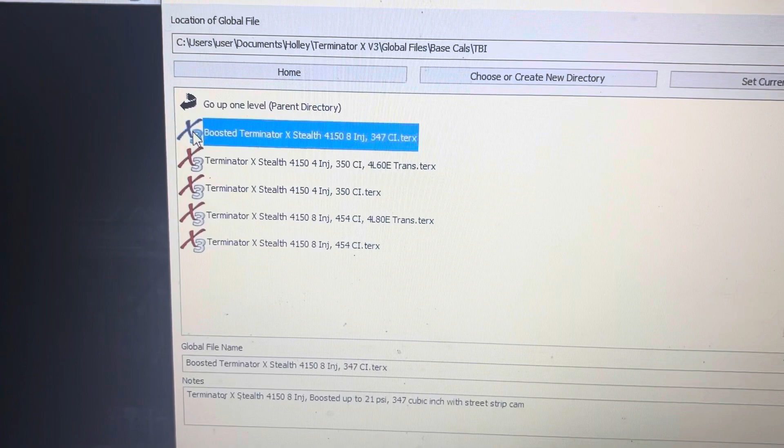You can go into the software and switch all the parameters to your exact setup. I started off from scratch, but this is just a cool little thing they did to get us started, fellas. You've got Hilborn, a small block Ford and a big block Chevy on there. As you can see, it can run just about any engine with some software changes and a harness swap. So it's pretty modular and upgradable. Some Hemi base cals.

And you know, it's really aimed at the GM, the LS. So let's go and click LS. Yeah, you see all the base cals it's got. Some naturally aspirated, I'm pretty sure, turbo, supercharged. This system is pretty badass, fellas.

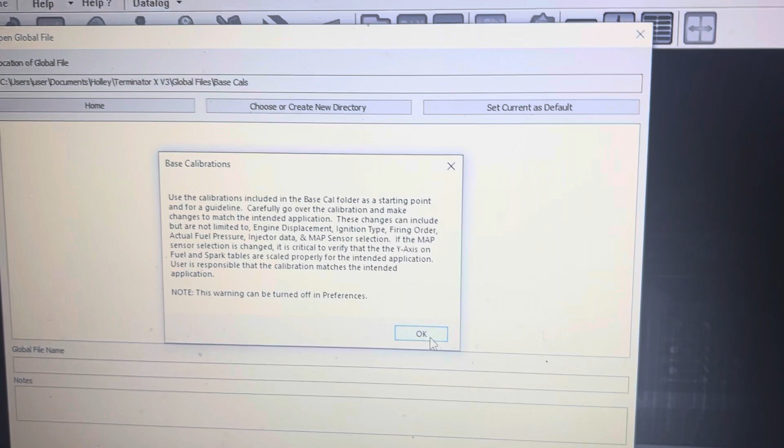How I'm using it is pretty basic with the TBI. Most guys will say if you're going to do it, you might as well go multi-port, and they are correct. But this is a pretty awesome system, the TBI too. You've got some LT base cals.

I think you'll also need another module if you're going to do the LT stuff, the Hemi, or the Fords. I think you probably have to buy an extra module. But you can run the Godzilla, the Coyote, big block mod motor, and the small block Ford. It's pretty badass, fellas.

I'm going to go into my file. What you see right there, LucilleVE, that's what I named it. You can go right in and go to open. When you open it, this is what you'll get. Across the top right there, those are ICFs, which stands for individual config files.

You've got your fuel, sensors, your system ICF, your idle, your spark, your inputs and outputs. You've got advanced, comparison, and an IO pin map. They constantly come out with new updates, and the last update added the ability to test outputs and traction control. You've got data logging and a few other ones.

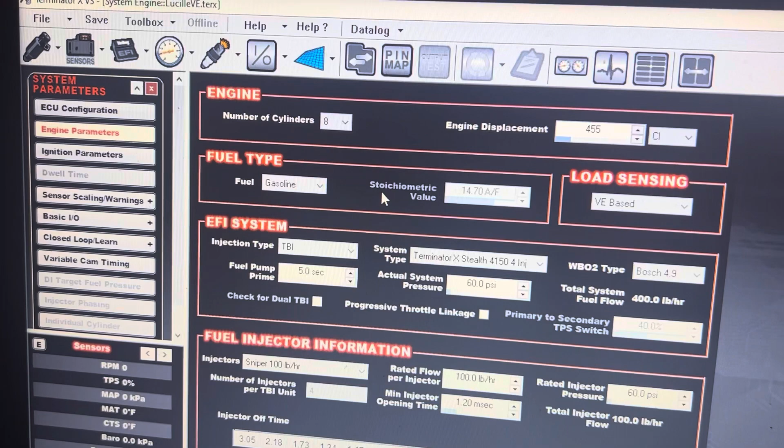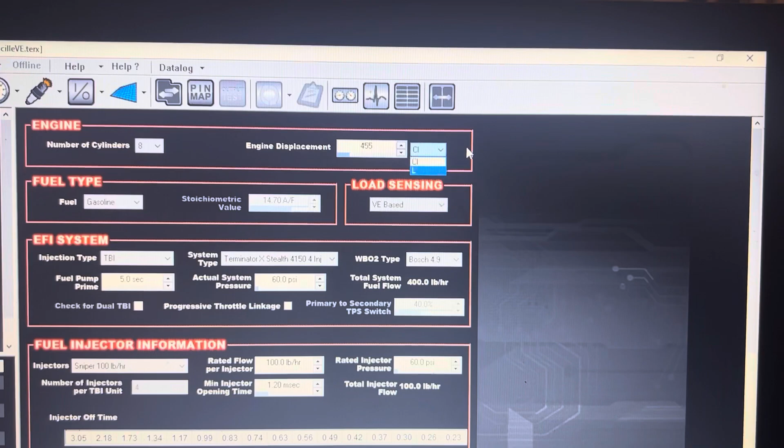The first thing you should do when you first get in here is go to the system ICF and set it up. I'll show you how that looks. You've got your number of cylinders, engine displacement. I've got a 455, and you can change it from cubic inches to liters, because a lot of guys run LSs, which are basically in liters, like 5.3 liters, 6.2. So I can change it to liters if I wanted to, and it'll be 7.5 liters for the Olds 455. The fuel type, you've got gasoline, E85 and advanced.

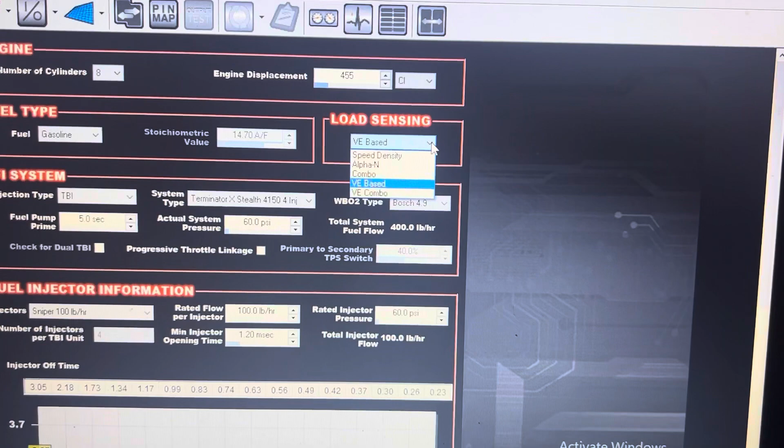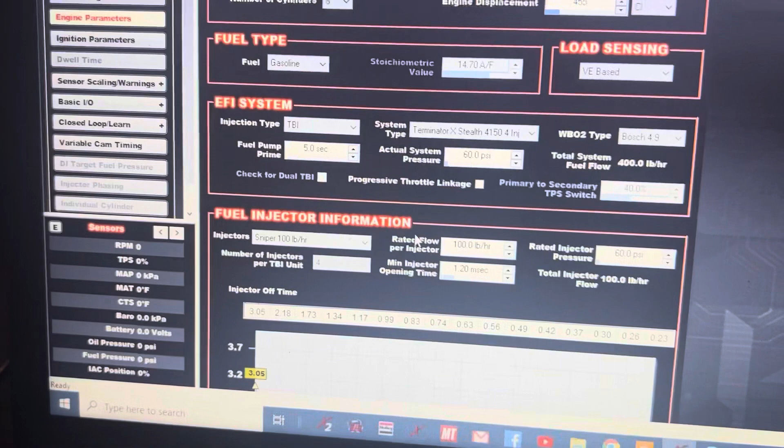You see the stoichiometric value right there. Load sensing, I've got mine on VE based. I found that's the easiest one. Some guys might run speed density, and there are a few other options for racing or stuff like that. You've got your injection type. You've got multi-port, direct injection. I've got a TBI, which is a throttle body unit, so that's why I've got that.

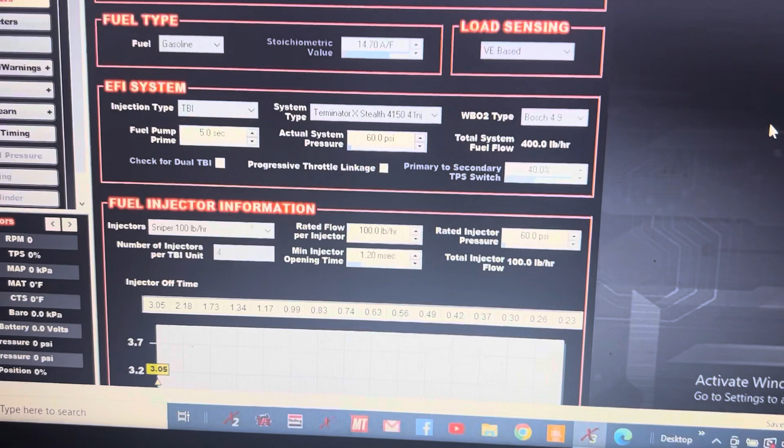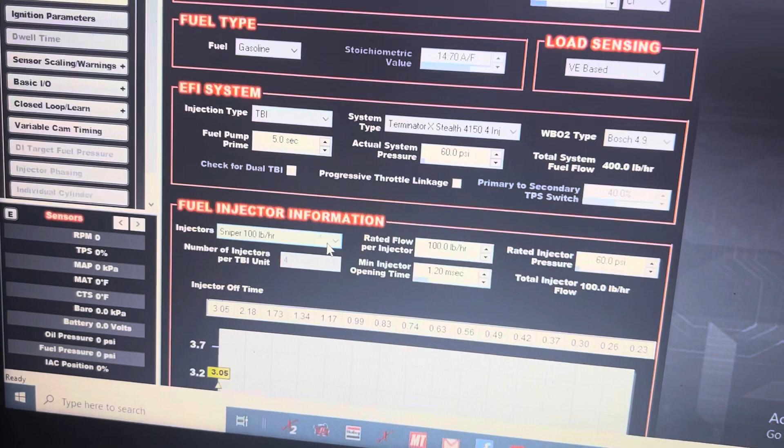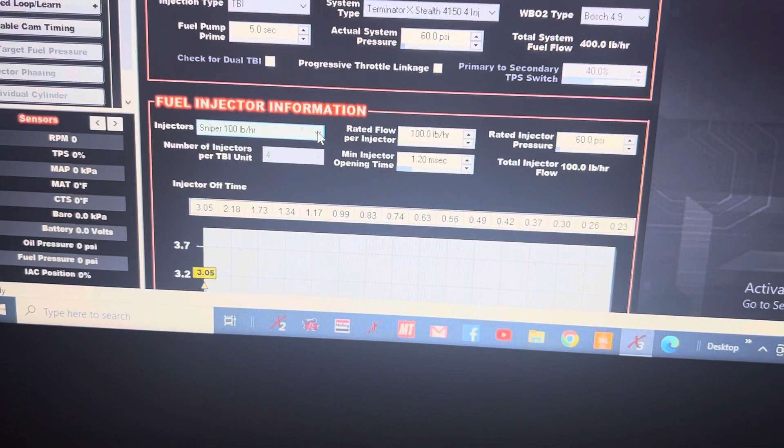But if you choose multi-port, it'll give you a ton of injectors to choose from down there. I've got mine set on TBI, so I only get options for the TBI injectors, which only gives me a few options. I can do custom. Most of the time when you buy injectors, they come with the data, so you can plug that in down at the bottom.

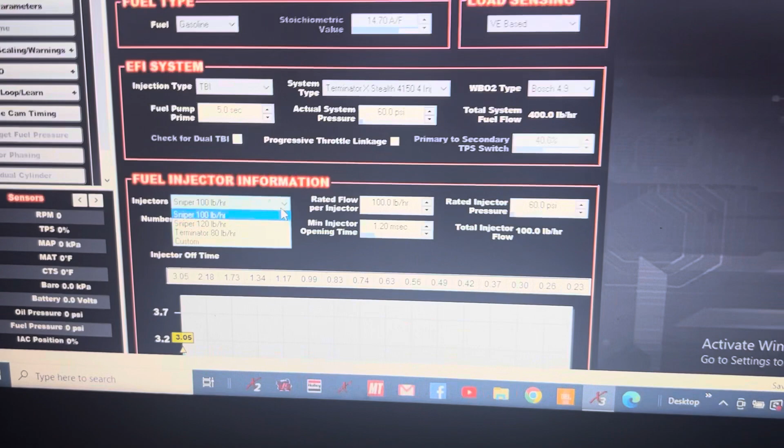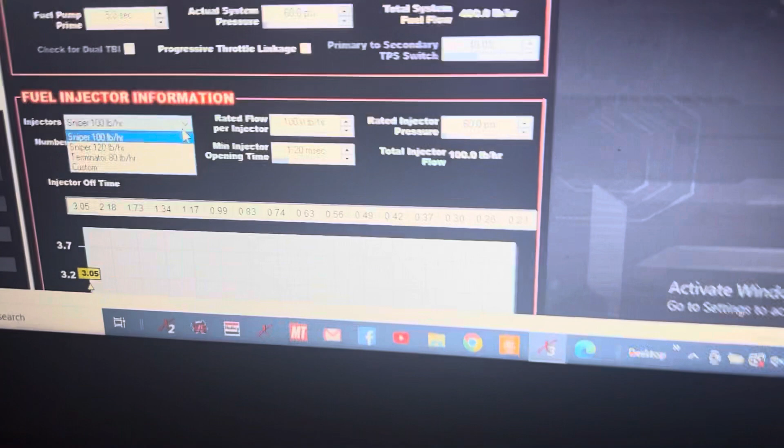With the VE based setting, all these need to be correct for it to do the math and come up with the correct fueling for you. So you want to make sure all that information is correct, as far as your actual fuel pressure and what your injectors are rated at. You want to make sure all that information is correct. Once you get all that set up, you can go over here to ECU configuration.

So I got the Terminator X, but it does give you the option to choose the X Max. And I think this ECU is really aimed towards just the daily driver LS swap, and the guys that are doing basic racing. If you're doing major racing and stuff like that, the Dominator and the HP would be good for you, because they can do dual oxygen sensors and an NTK sensor. And this one only will do a Bosch 4.9.

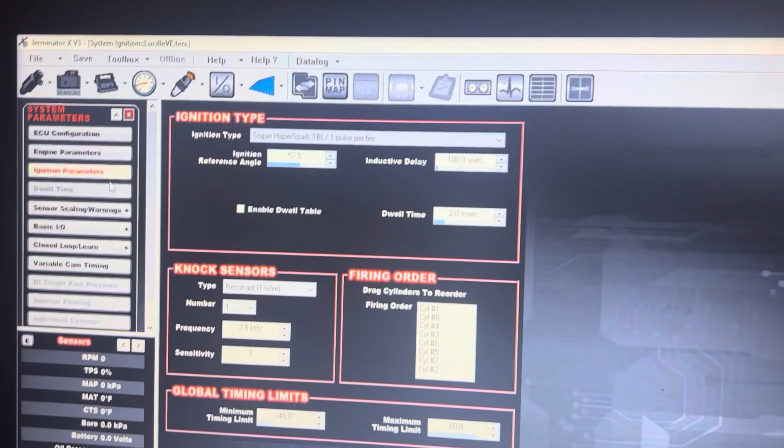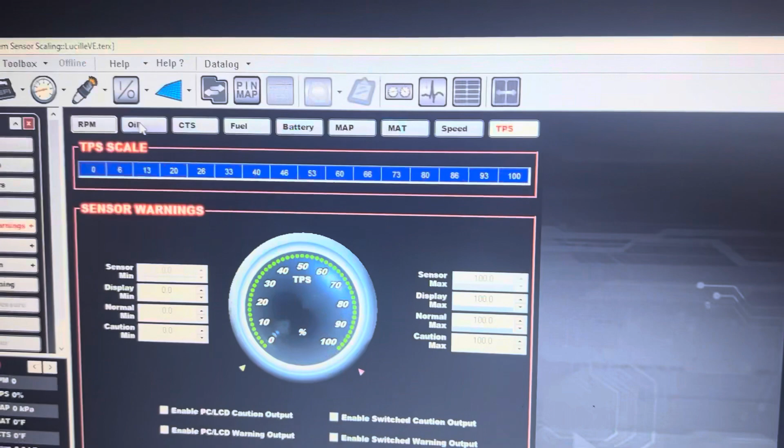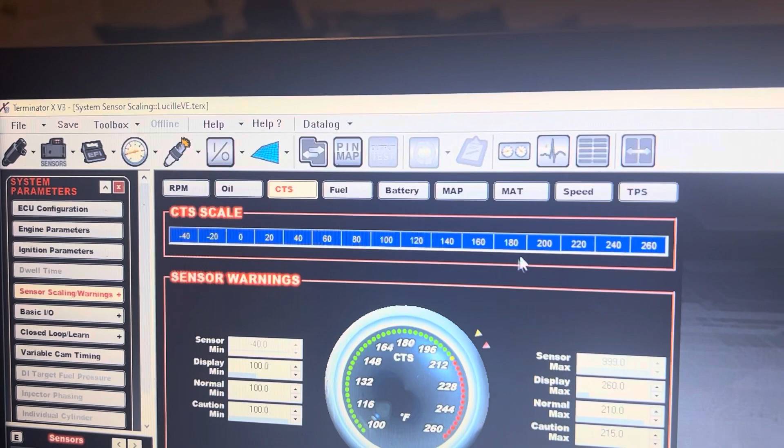And then your ignition parameters, whatever you got. I got the Sniper HyperSpark ignition system. And I just put all that information in, my firing order and stuff. And you got sensor scaling. You can just go through and set all your warnings for all your sensors. So if your coolant temperature gets too hot or something, it'll go off. And you got all that information right there. You can set that up.

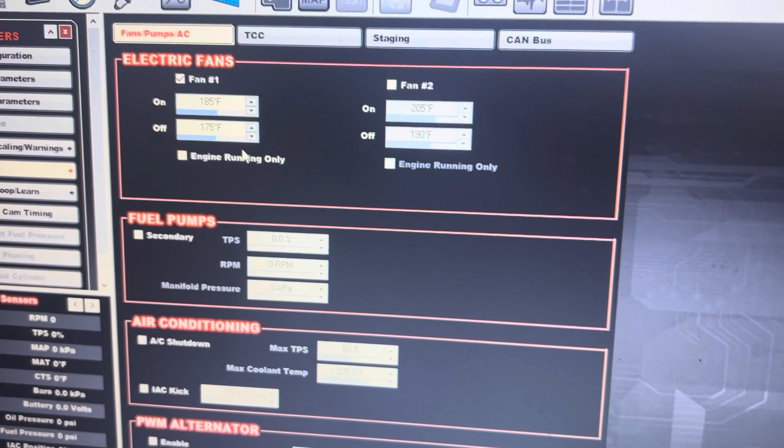Basic I/O. I/O is inputs and outputs, fellas. Input is something that the ECU sees. It's like the coolant temp sensor, the fuel pressure sensor, oil pressure. Anything that's information that it sees and relays on your display, that's an input. An output is something that the ECU is turning on, like fans, an AC compressor, fuel pump. That's an output. And those are just the basic ones you'll set up.

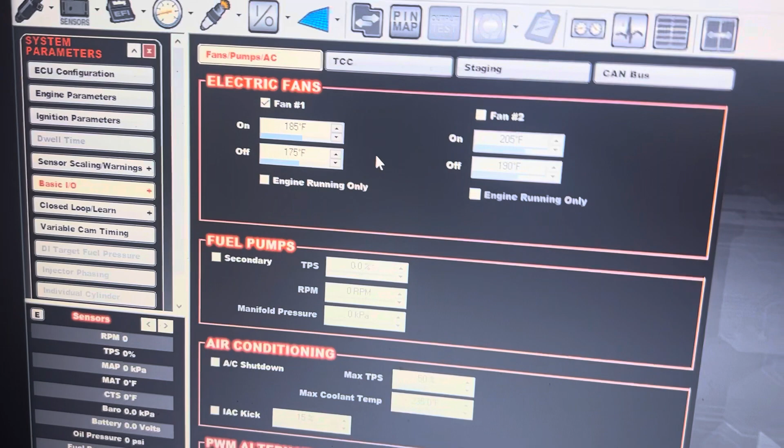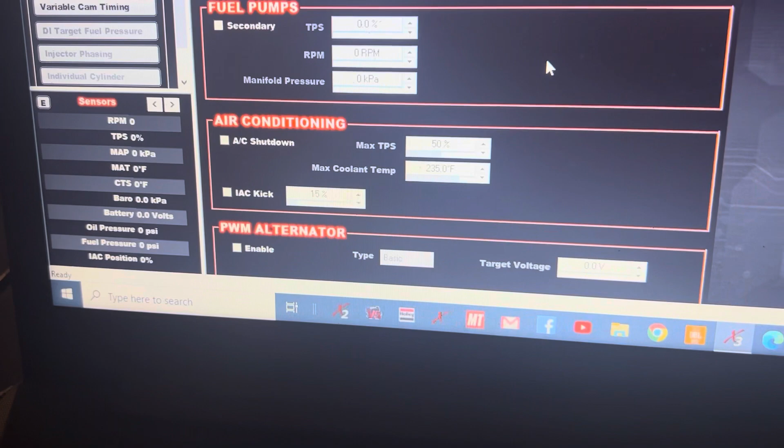It's got the ability to do dual fans, but I got both of my fans wired together. I got mine set at when the thermostat opens at 185, and they cut off when it falls below 175. And then you got the ability to do dual fuel pumps. And on the air conditioning, the AC shutdown, that is like when you go full throttle, you don't want the AC compressor on, so you can set it to whatever throttle position you want. I already got it wired, but when I charge my AC, that's when I'll enable it. And I'll probably set mine to like 80.

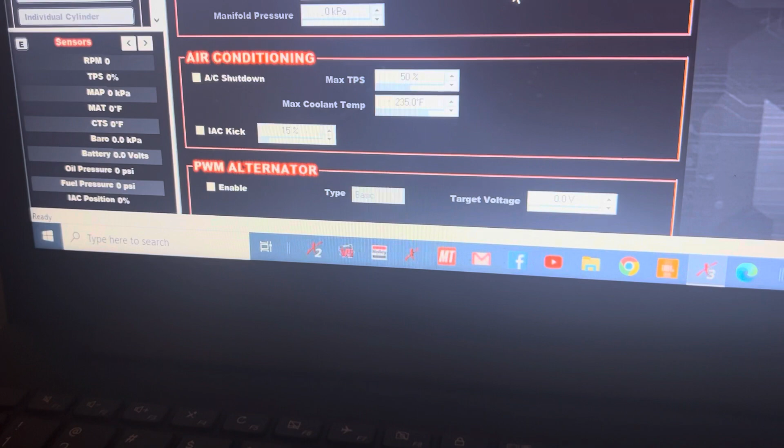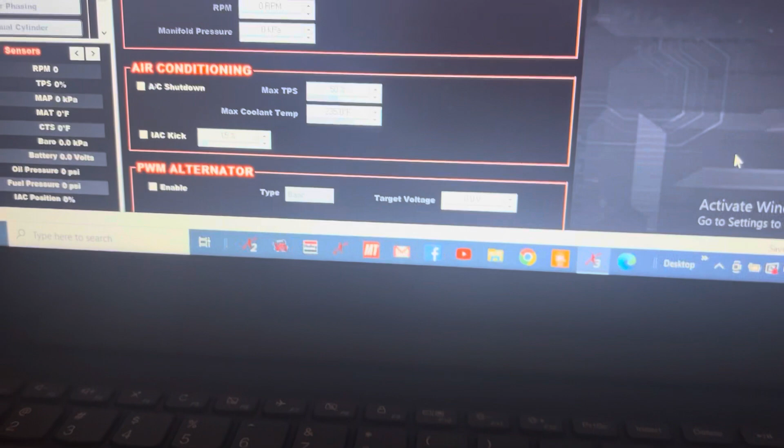And the IAC kick is basically once you turn the AC on, the compressor can drag it down, and you don't want it to drag it down and kill the motor. So you can set that to where it can kick up the idle a little bit if you need it. And then, I don't think this was on there when I first got it, they probably added it in the last update, the PWM alternator, which is pulse width modulation.

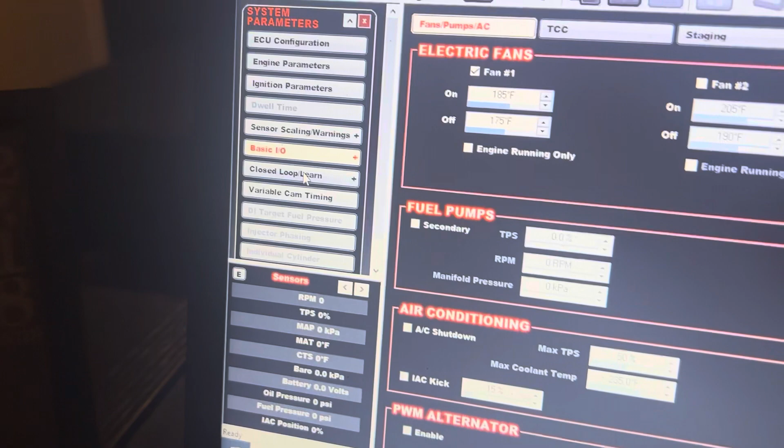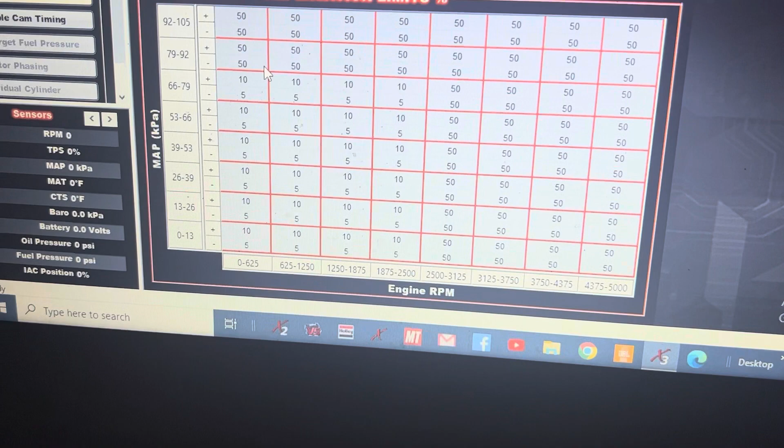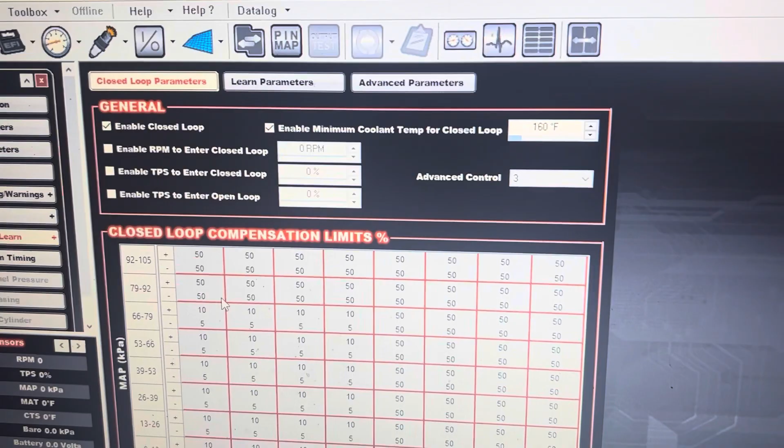Closed loop learn. That's basically how much fuel is taken out and added to achieve your target AFR. Once you get it dialed in, you want to dial these numbers back. I got my tune at the low end fairly dialed in, so I set those numbers back, but everything else I left because I still got to tune it at the top end. But you can go in and set it however you like. The closed loop starts learning and adjusting when it reaches 160, that's when it'll start adjusting the fuel.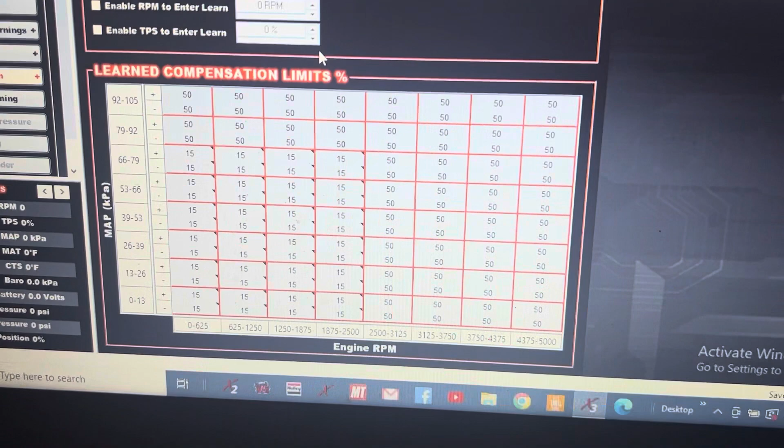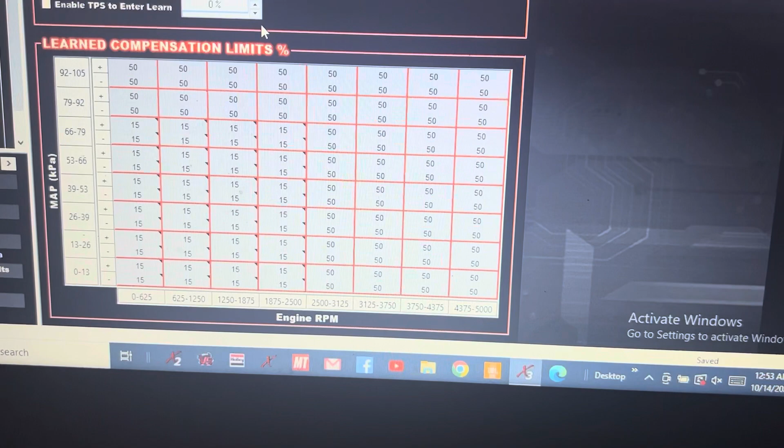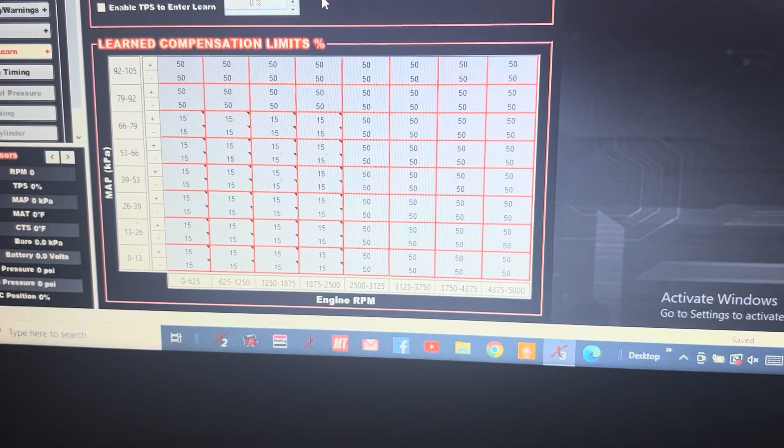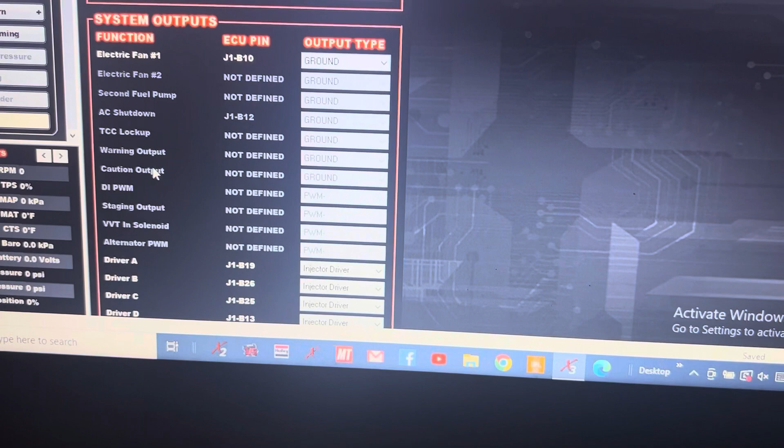Then you got your learn parameters. And that's basically the same thing as the closed loop learn, as far as how much it learns and takes away on the learn table. Most guys that are professionals don't even use the learn parameters. And once you get it dialed in, you can dial those numbers back. You got inputs and outputs. That'll basically just show you all the inputs that you're using and not using.

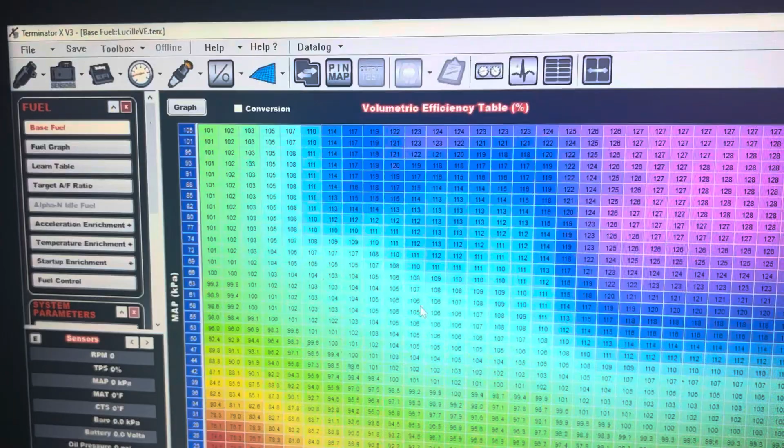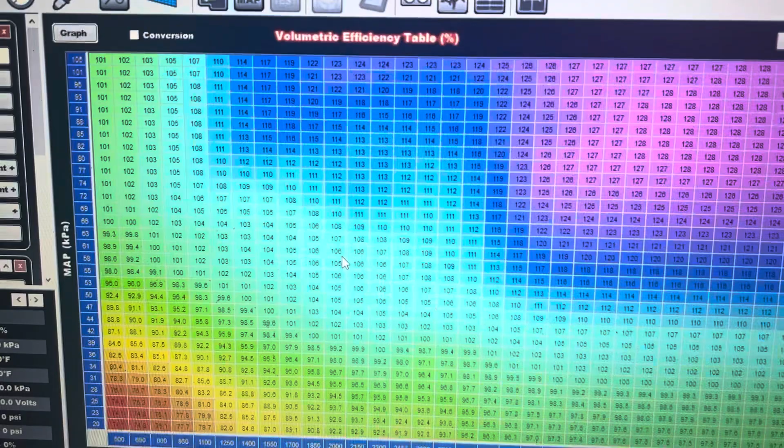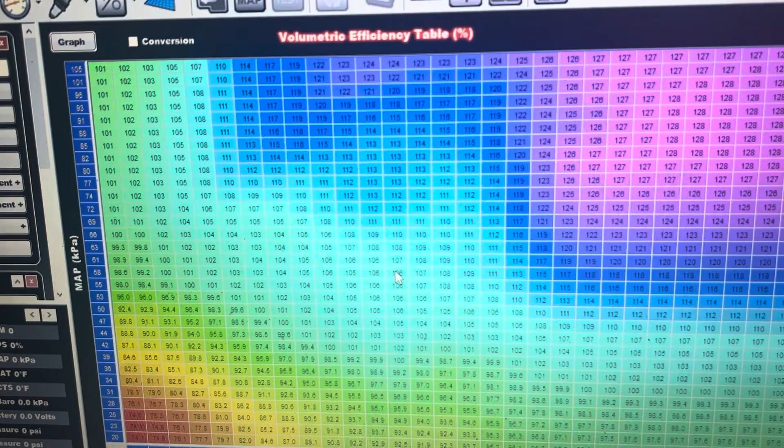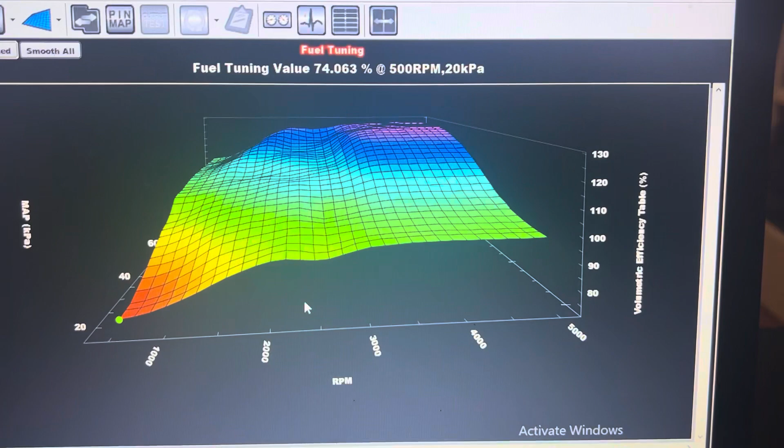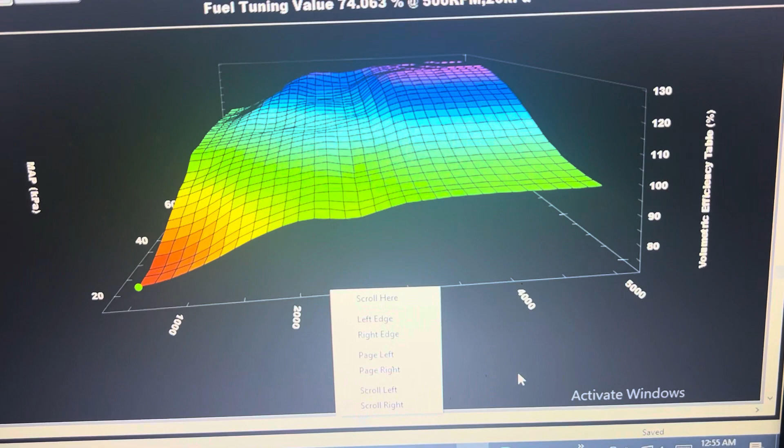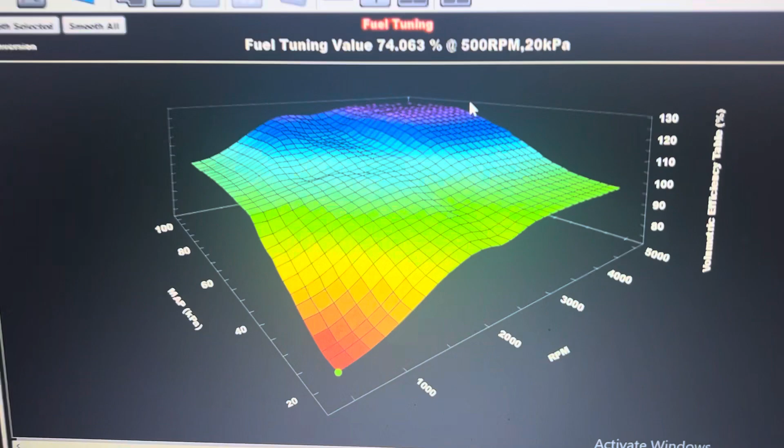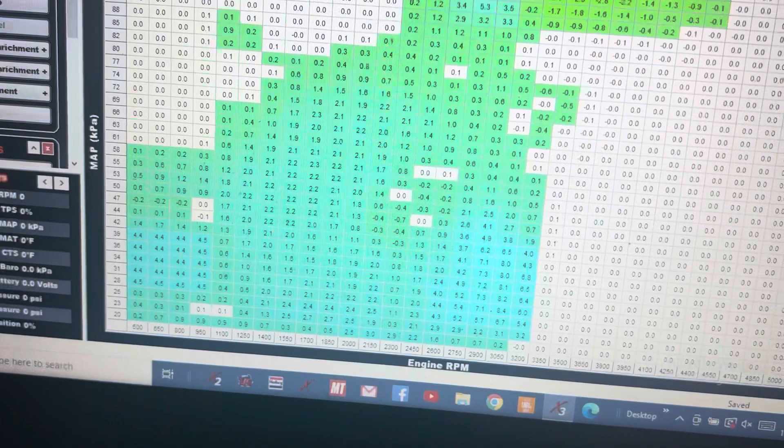You can go to the fuel graph, and it'll show you your fuel graph, so you'll know what areas need to be smoothed out, because you don't want any dips, valleys, or spikes. So you see I still got a little tuning to go on this one, just to get it dialed in. Y'all saw in my previous drives it ran good, but I still need to do some tuning. You go to my learn table, and that's basically when I drive, what is taken out or added to achieve my target AFR from my base fuel table, fellas.

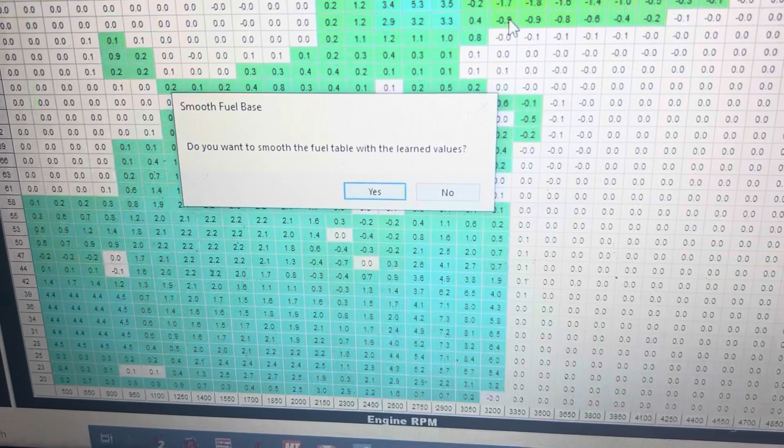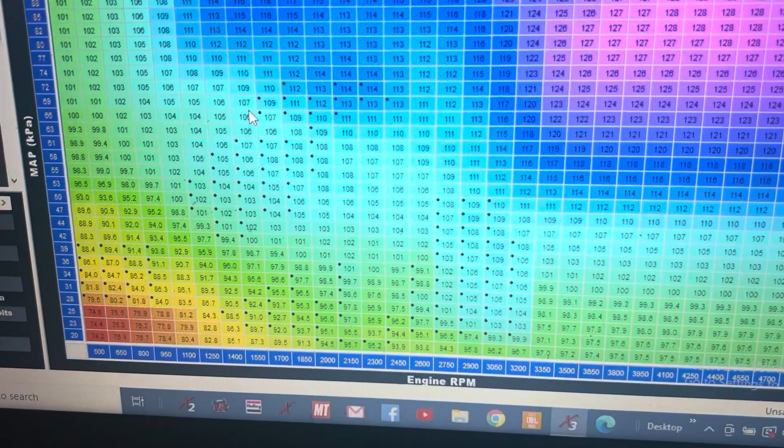So you can transfer this, as you see it right there, transfer learn to base, and it'll copy it to your base fuel table. You can go in and it'll ask you, do you want to smooth the table? And I always hit no, and I just manually do it. And if you go back to your fuel, I ain't gonna save this, but you'll see all the ones with the asterisk, that's what it's changed. And you go to the fuel graph, now you see my fuel table is changed.

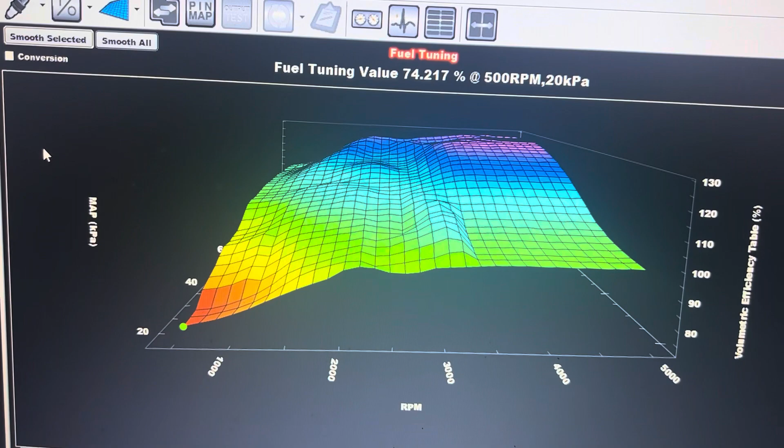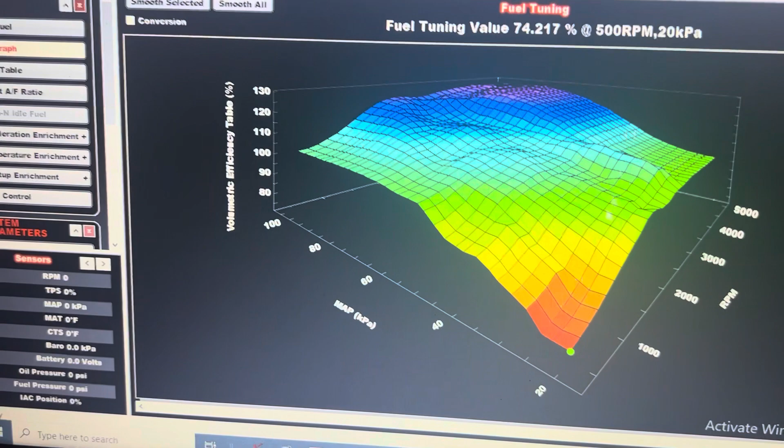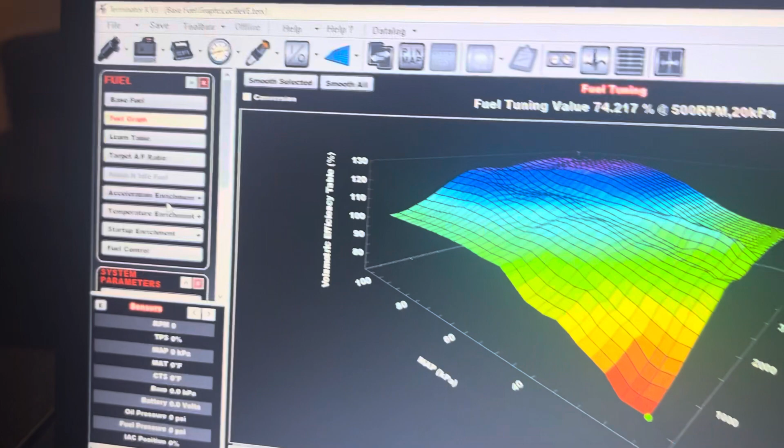Now I have to go in and just move it out so it'll run good. You want it to be as close to zero as possible on the closed loop comp. But it's something to play with, fellas. And you can always go up here to help and go to contents, and it'll bring up a whole help menu. You can just read that, fellas, and it'll go through all these details and stuff. I'm just gonna give you a walkthrough.

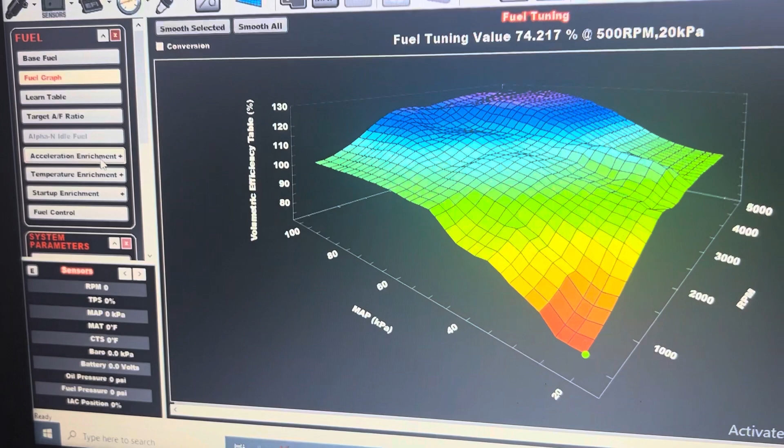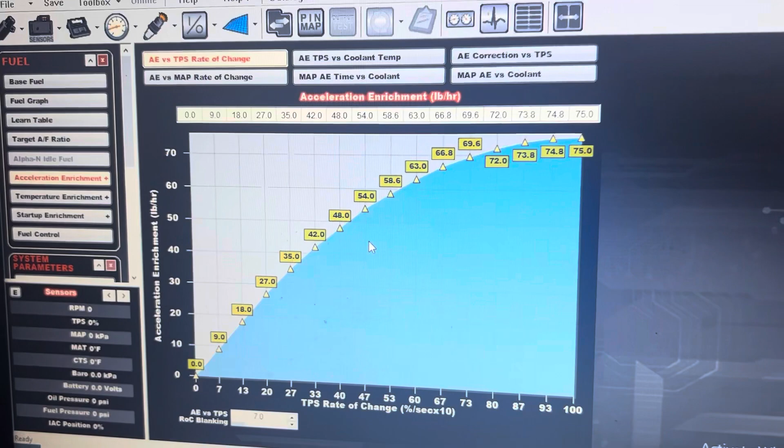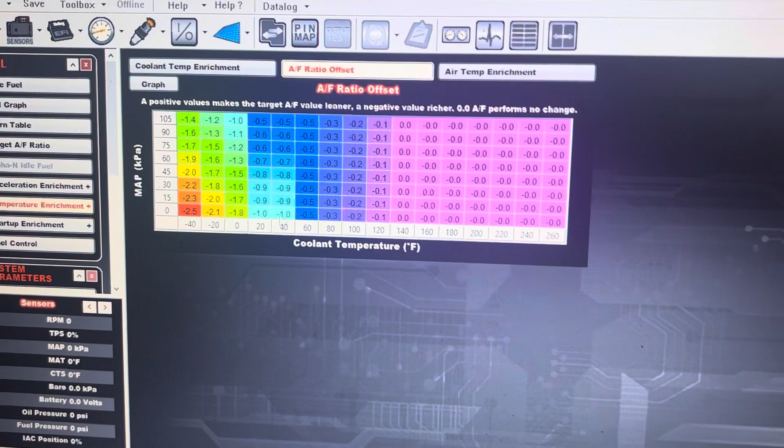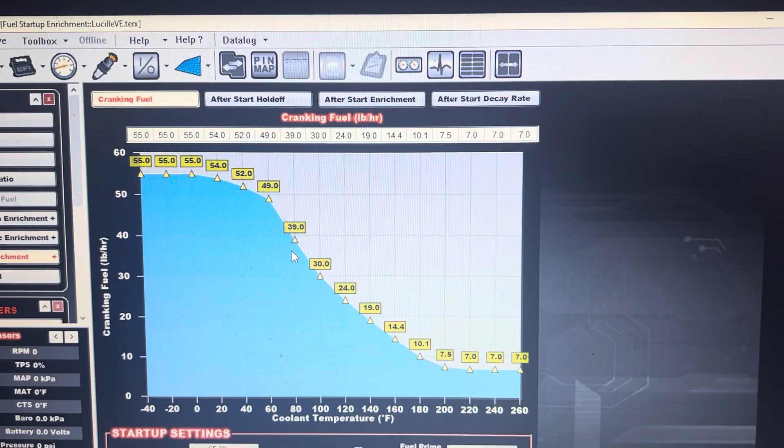Acceleration enrichment, I kind of look at that like the accelerator pump on a carburetor. And you can go through the contents and read what all these are. Then you got temperature enrichment. That's basically when the engine is cold, it'll richen it up so it'll warm the engine up. When it's cold, you need more fuel to run. Startup enrichment, I think that's pretty much self-explanatory. How much fuel it's adding to start the car.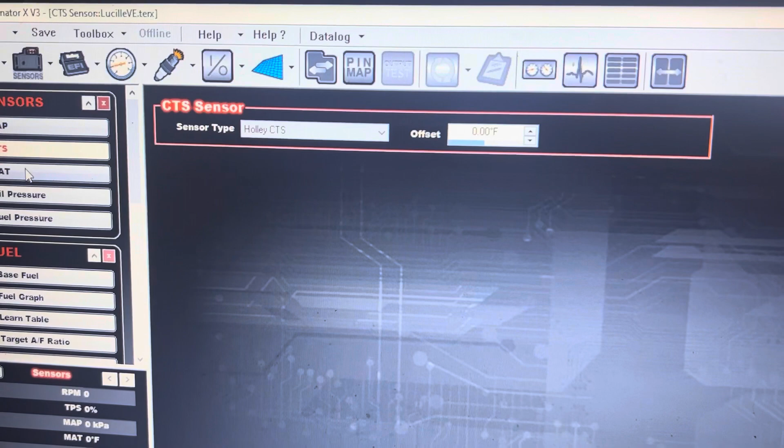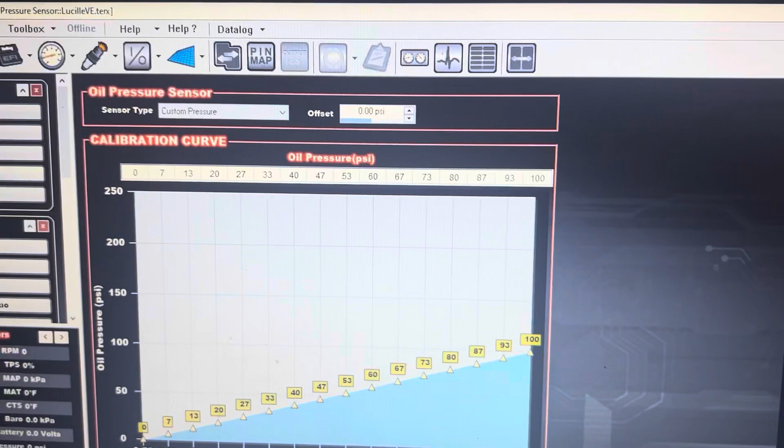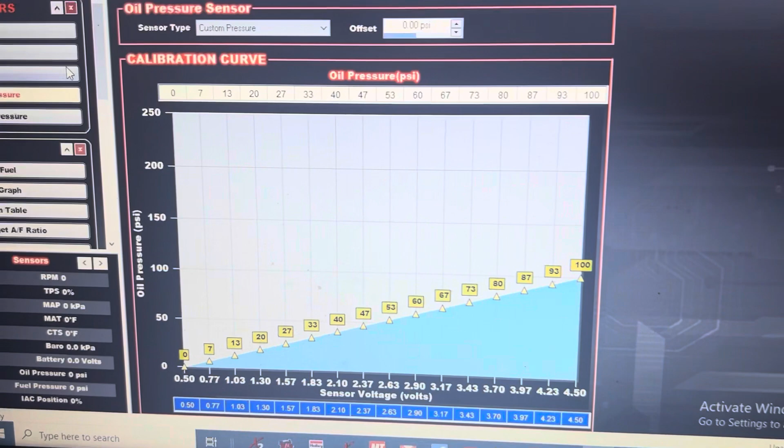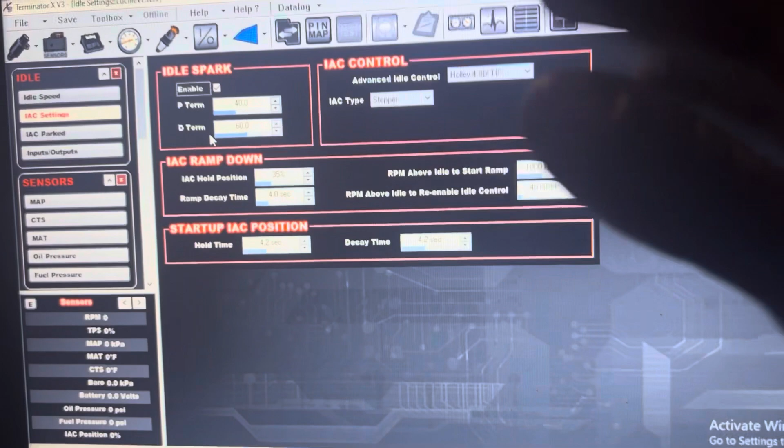Fuel control, haven't dived into that. Sensors, you just go through and pick exactly which sensor you're using. Holley, GM, Ford, whichever one. And you do have the ability to do custom ones, like my oil pressure is custom. I got it from Low Dollar Motorsports, and it comes with the data to plug in. You just plug that in. Your idle, your spark, your IAC control, your ramp down, and your startup IAC position. Read the contents, and you'll get a better understanding of each one of those. IAC parked, and then you got your inputs and outputs on that.

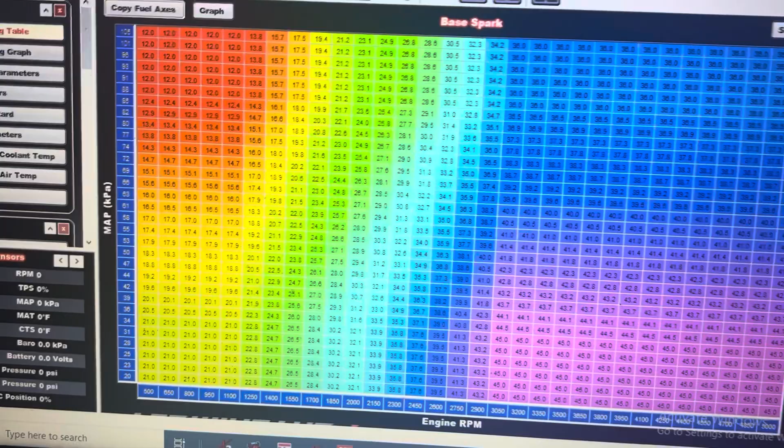Spark table. That's basically just showing you your ignition timing. You got RPM at the bottom and manifold absolute pressure on the other axis. And you can set this to whatever your engine likes. You know what I mean? LSs don't like a lot of timing, and I got a 455, so I looked up what the engine likes and I plugged those in. And it does give you a graph if you want to see that.

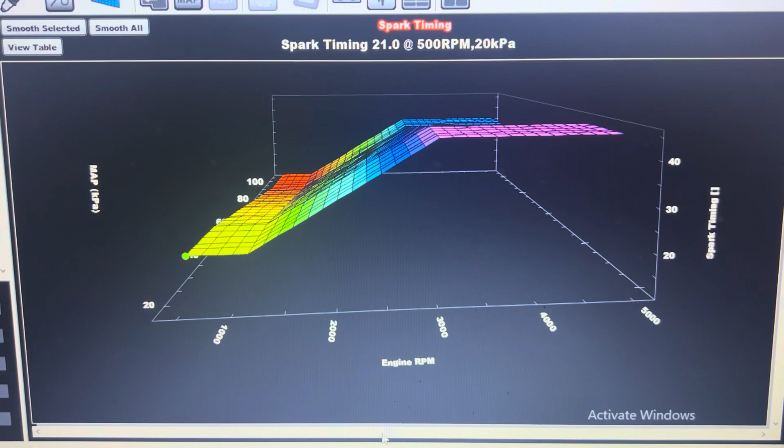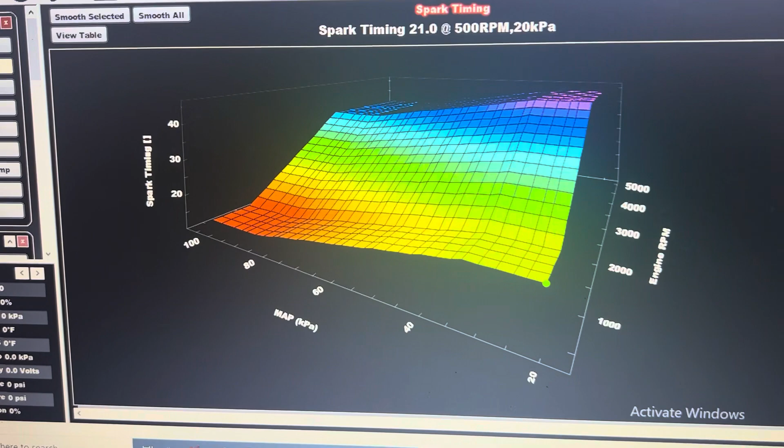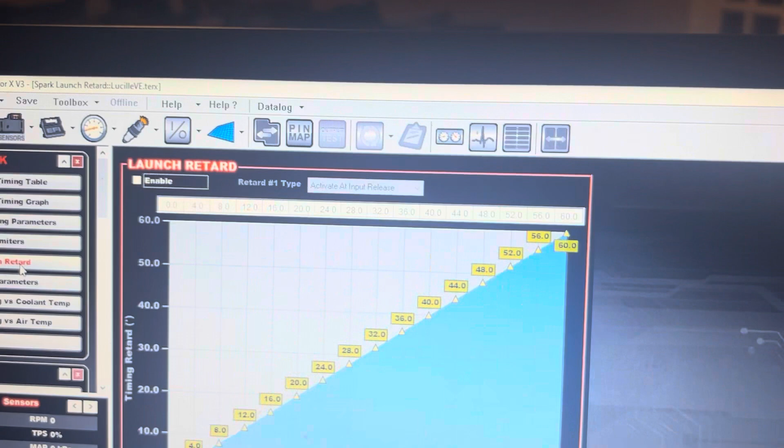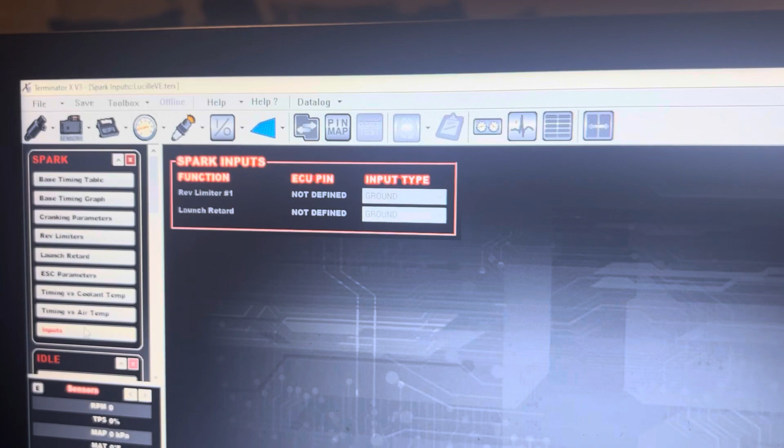You got cranking parameters, which is just your timing and crank to run RPM. Rev limiters. I got mine set to 4,500. I got a big block, and it's old, so I don't want to spin it past 5,000. Launch retard, I haven't got into any of this stuff, fellas. But this is pretty awesome. So when I don't have nothing to wrench on, or when I'm saving up to buy parts, I'll work on my tune and read the contents and see if there are any other videos made to help you learn how to tune, and that's how I go about it.

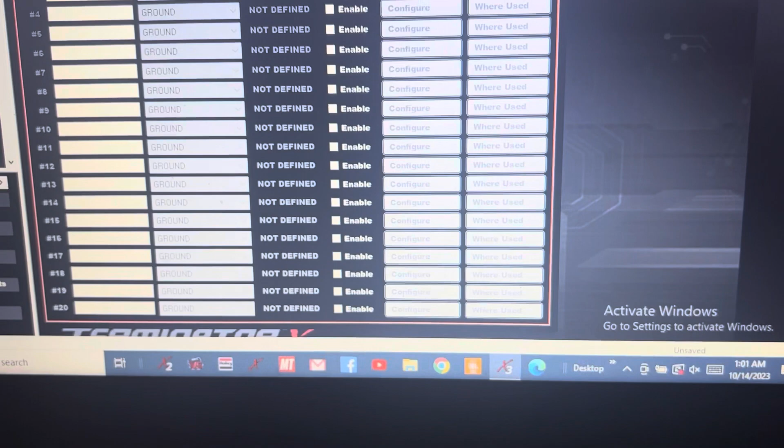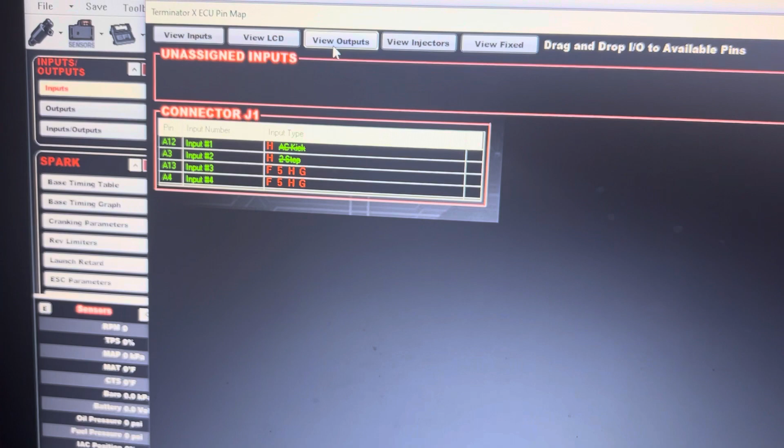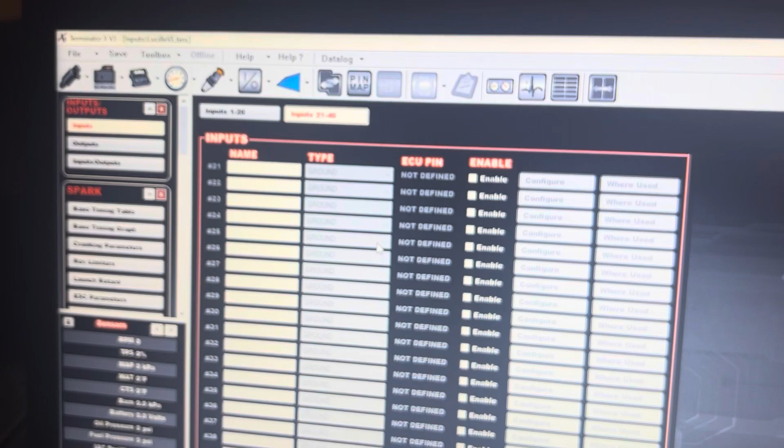You got your IO, and I had my 2-step wired, but I took it out. It's still wired, but I disabled it. What else we got on there? Go to pin map, and you'll see where I had my AC kick disabled and my 2-step disabled. And go to view outputs, which is my AC shutdown. And I still got my electric fans, both fans wired to one. It's a pretty bad system, fellas. It's awesome. You can do data logging. This is just a walkthrough. I haven't even touched the surface of what this thing can do. But this is my engine management system, fellas.